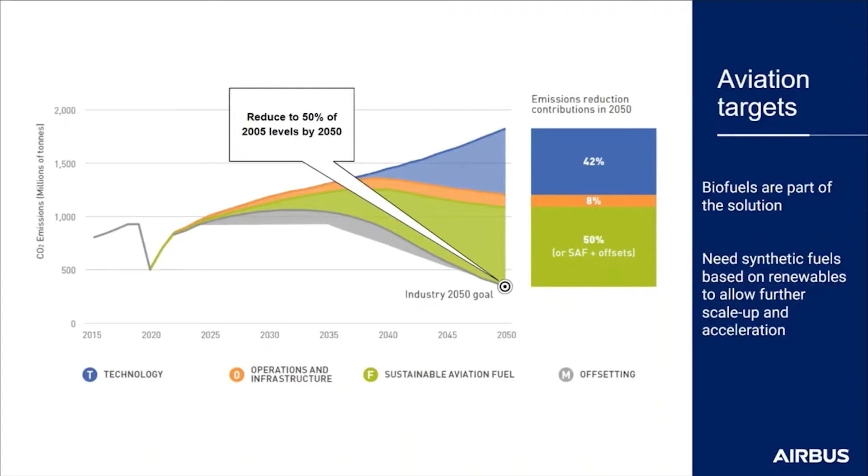But on top of biofuel, we need to scale up the use of synthetic fuels. And synthetic fuels essentially are of two types. The first type is what we call a drop-in fuel, a fuel that we can use in existing aircraft. And the other type of synthetic fuel is hydrogen, which can be used in its raw form on future ZEROe aircraft, which we're planning on bringing into service by 2035.

What we also see is a huge and fast evolving societal and regulatory expectation. We have seen that the UK was the first major economy to pass a 2050 net zero.

Sorry, it seems to have dropped out again.

UK was the first major economy to pass a 2050 net zero emission law. We saw New Zealand following suit in November 2019 with the 2050 net zero emission law. The EU stated its ambitions for the EU Green Deal in December 2019. We've seen Japan in October 2020 stating a greenhouse gas emission reduction plan to zero by 2050.

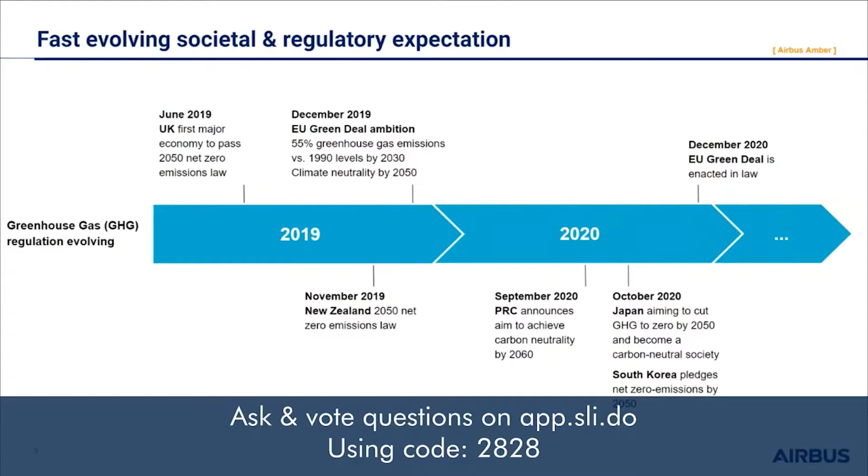At the same time, what we need to do is get rid of the climate impact. We know that this is what is needed in terms of future business, and we also know that it's a moral obligation to provide the benefits that aviation can provide without its climate impact.

The other element of strategic context that's quite important to take into account is that synthetic fuels, whether it's drop-in fuels or hydrogen in its raw form, need to be generated from renewable energy. So essentially what we're talking about is powering the future of aviation with renewable energy.

And those of you who've done your calculations will know that we can't put solar panels and wind turbines on top of aircraft. So we need to keep those on the ground while using hydrogen and synthetic fuel as a surrogate for that renewable energy on board the aircraft. And if that's our plan, then it's really important to understand what's happening in the renewable energy ecosystem.

And those of you following the discussion about what we need to do to get to the Paris Agreement, not just for aviation, but as a society at large, will know that we're not there yet in terms of renewable energy in absolute quantities. We still have huge progress that we need to make. But what's very interesting to look at is how renewable energy is growing over the last 5 years and what the predictions look like going into the future.

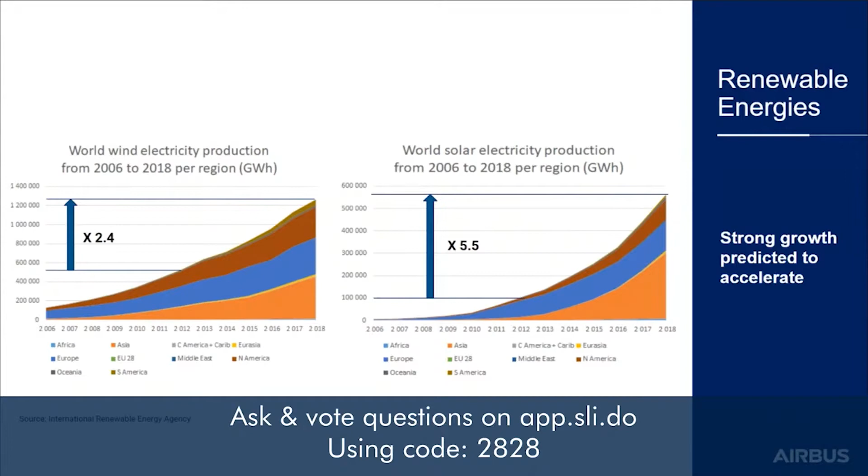And these figures are about to be published for 2019 and 2020. And we will see this growth continuing, and it will continue to grow, in our view, at an exponential rate as we go through this current decade. And strategically for Airbus, that's important because it means that we will be able to power aviation with renewable energy with this strong growth of renewable energy that we're going to see over the next few years.

What's also really important in terms of strategic interest for Airbus is how the hydrogen economy is developing. And Ron mentioned earlier how the hydrogen story has gone almost viral, and it's true. I started on this project in 2017. It got officialized inside Airbus in 2018. At that point in time, there were for sure some signs that hydrogen could be interesting for various sectors to decarbonize, but not the same level of commitment, of communication, of demonstrators, of vehicles as what we see today.

There are now 9 truck companies who have either revealed hydrogen concepts or have hydrogen vehicles even currently on the road. The diesel trains are in many cases going to be replaced by hydrogen trains, where it's more cost effective to put hydrogen on board rather than put electrical systems overhead. We see the shipping industry going towards liquid hydrogen, in particular for what are called intracontinental missions. Perhaps the longer deep sea missions won't be appropriate to be covered by hydrogen, but the intracontinental missions look of interest. And we see more and more hydrogen buses being put on the road across the globe because of hydrogen's potential to eliminate emissions.

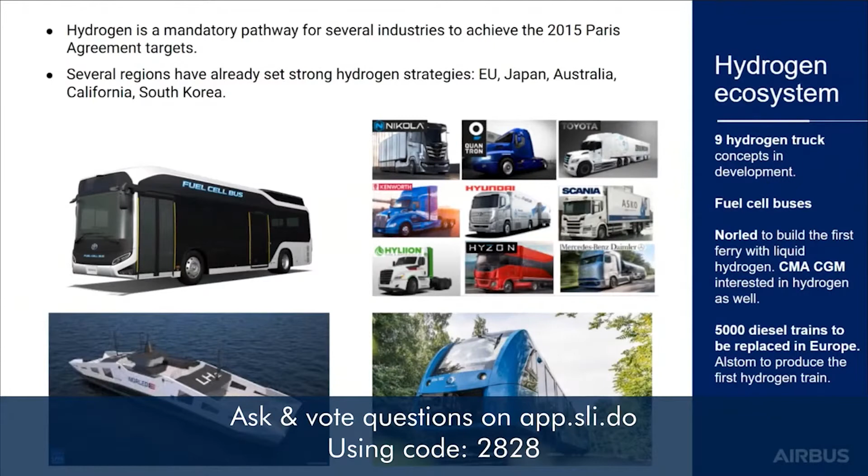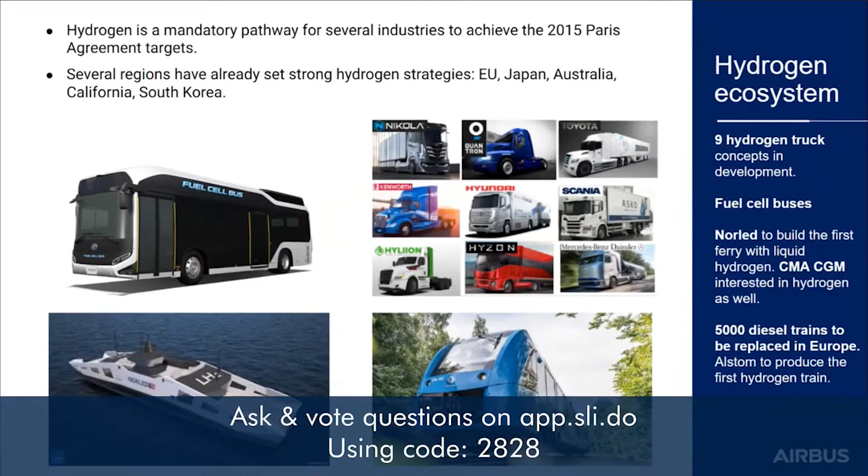And this is super important for aviation because on our own, we cannot create the hydrogen ecosystem that's necessary. And what's doubly important is how the trucking industry and intracontinental shipping is starting to focus on liquid hydrogen as its energy carrier, which is really what we need for aviation. Liquid hydrogen is the only option for us really for interesting payload and range, and therefore having a liquid hydrogen ecosystem and teaming with trucking, with intracontinental shipping is going to be important to drive the ecosystem in the right direction.

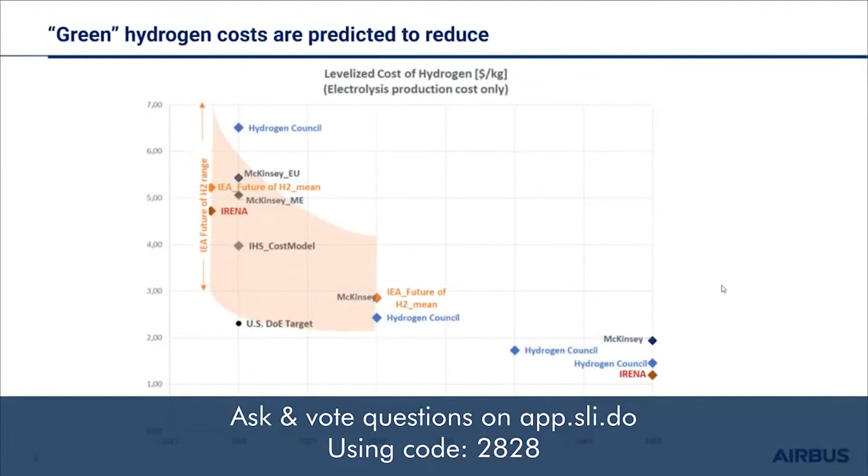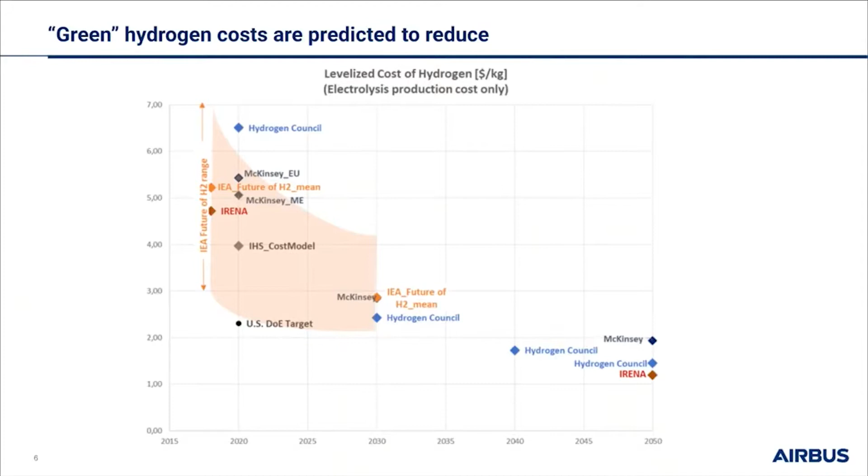What all of this means, the renewable energy growth, which I showed you earlier, the huge commitments from various industries to be scaling up use of hydrogen over the next decades, is that we're going to see a significant reduction in cost of hydrogen over time. And that's important because ZEROe is not just a technology project. It is about making zero emission flight economic. It's about bringing accessible aviation to be available and to be economically accessible by everybody. So the price of hydrogen and how it evolves is going to be critically important in our success.

And it means that we are working with an ecosystem which goes beyond the usual aviation borders, from renewable energy providers all the way through to liquid hydrogen producers and airports, to really make sure that we can get the right cost of liquid hydrogen at the airports and therefore make zero emission flying commercially interesting.

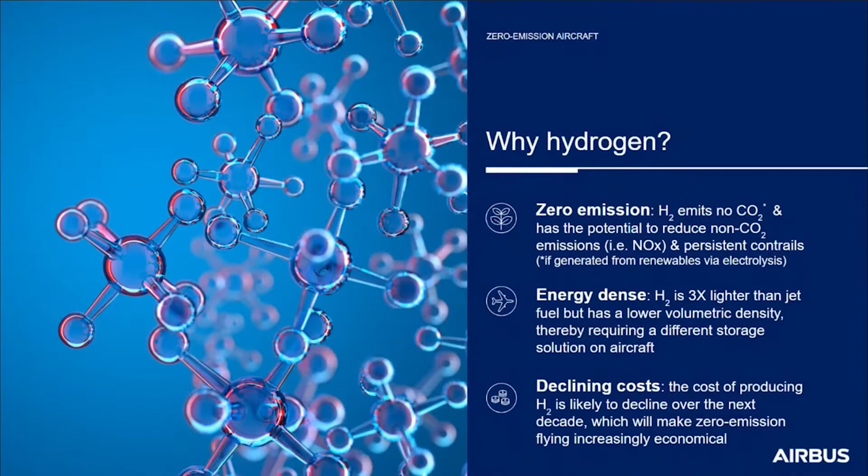So a little bit on why hydrogen. Hydrogen, if it's produced from electrolysis, which is really the pathway we are encouraging and pushing, emits no CO2 during its life cycle. It has also the potential to reduce what we call non-CO2 emissions, NOx and persistent contrails. Potentially, it can completely eliminate these non-CO2 effects. And I'll talk about that when I talk about one of the aircraft concepts that we revealed in December last year. And so therefore, hydrogen provides us with the potential to have genuine zero emissions aircraft.

Hydrogen is energy dense, certainly compared to batteries, which is the only real zero emission alternative. Hydrogen is significantly more dense. We're talking about orders of magnitude in terms of watt hours per kilogram of energy storage. For sure, it has some complexities in terms of the amount of volume that hydrogen requires to store, and that does impact how the aircraft are designed, but something that looks feasible to be able to master and take into account for bringing these aircraft to reality.

And hydrogen is on top of interest because of how we believe the economics of hydrogen are going to evolve over the next decades. We're going to see the cost reducing. We're going to see hydrogen becoming a part of more or less everyday life. If we look at what is required, not just for aviation, but at the global level for us to meet the Paris Agreement, hydrogen is going to be a big part of that story. And so costs are going to come down, availability is going to come up, and we're going to benefit from that in aviation.

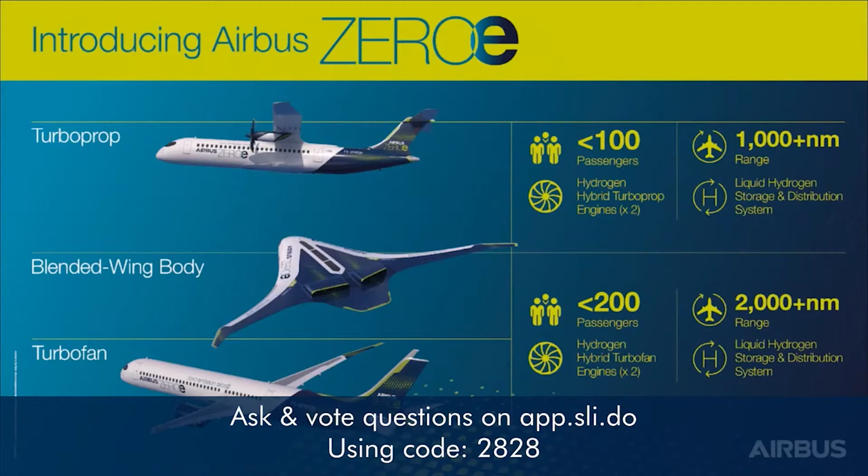Then the aircraft configurations do look quite different. The top configuration is a turboprop configuration. The bottom one is what we call the turbofan configuration, and then in the middle we have the blended wing body. And what I'd say maybe to make things clear is that the blended wing body for sure is a configuration which looks really interesting in terms of ultimate ambition for a hydrogen-powered aircraft. But it is not likely to be the first zero-emission aircraft that we bring to market by 2035.

The blended wing body, because of this extra volume that it has naturally inside that configuration, is a great platform for storing hydrogen, which has more volume requirements than kerosene. But dramatically changing the aircraft configuration and the propulsion system in one step we see as too much, and therefore what we're likely to have as a first step is a tube and wing type configuration similar to the turbofan or the turboprop aircraft, but with a dramatically different propulsion system.

And what you see in terms of numbers here is that the hydrogen aircraft have quite a large range of scope. It means that all the way from general aviation, which many of you have probably seen examples of, all the way up to 100-seat and 200-seat aircraft, hydrogen can help with eliminating their climate impact, and all the way from 1,000 to 2,000 nautical miles in terms of mission. So hydrogen has quite a range of application.

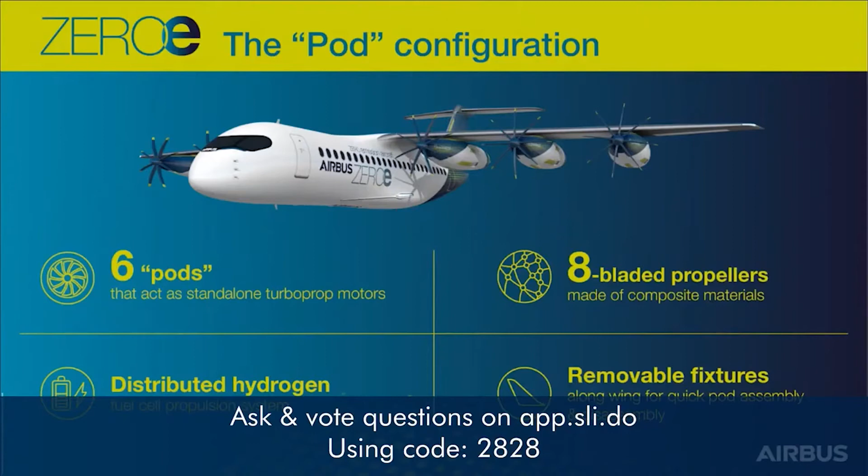We're still working on how the technology scales to what aircraft size and what economics we could have with this kind of configuration. And between all four concepts and several concepts that we've not publicized, we're looking at different options in order to decide which is the final configuration that we want to bring to service. So hydrogen is not without its challenges. We're not doing this because it's easy. We're doing this because we think it's the right thing to do.

In terms of challenges, for sure, the technology in some areas exists already. So for example, gas turbines have even flown in the past with hydrogen combustion. The US Air Force flew a B-57 in the 1950s with hydrogen. The Tupolev 155 was flown in the 1980s with hydrogen. But we need to bring the weight and cost down, adapt it to commercial applications before it would be ready to be taken on board a commercial aircraft.

In terms of regulation, we are not today using hydrogen in commercial aviation, and so standardization, rulemaking, all needs to be put in place in order to allow us to do that. The infrastructure needs to be put in place, and we're working with airports and energy suppliers to even start bringing hydrogen into airports in the 2020s. So we are developing a concept called hydrogen hubs, airport as a hydrogen hub, where hydrogen is used in the 2020s to decarbonize ground applications around airports, and then scaling up and readying the airports for hydrogen usage on aircraft in the 2030s.

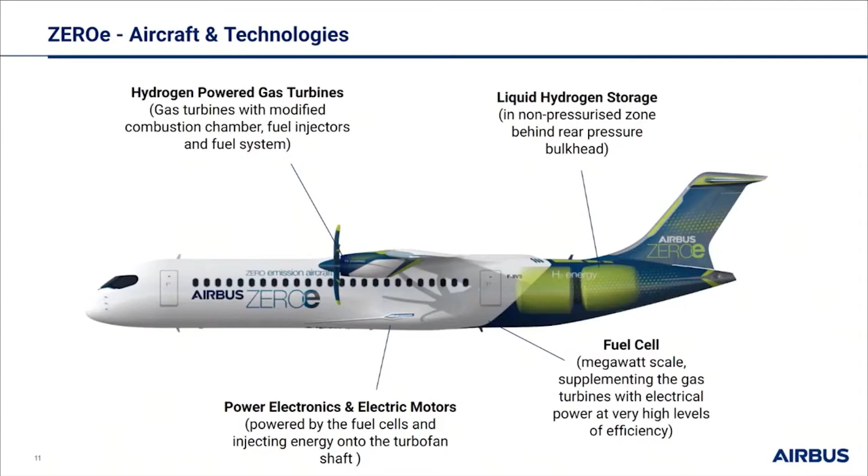for independence for safety. We have fuel cells which are required in this hybrid electric configuration in order to optimize the propulsion system. Fuel cells can operate at 60+% efficiency. During some phases of flight, the gas turbine is operating at significantly less than that, and so complementing the gas turbine with electric power from the fuel cells can be interesting. We have power electronics and electric motors in terms of technology which allow the conversion of the electrical energy into shaft horsepower that are embedded also in the gas turbines.

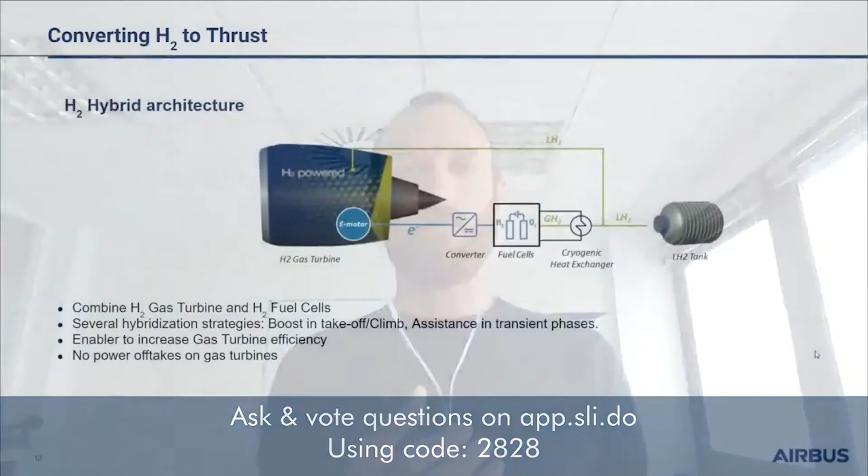In terms of architecture, the simplistic view is what you're looking at now. So you have the liquid hydrogen tank on the right-hand side. This is then feeding both the gas turbine for hydrogen combustion and then a parallel path for a parallel hybrid configuration, which feeds the fuel cells, the electric converter, and the electric motor. The combination of the two in a hybrid electric parallel configuration looks very interesting.

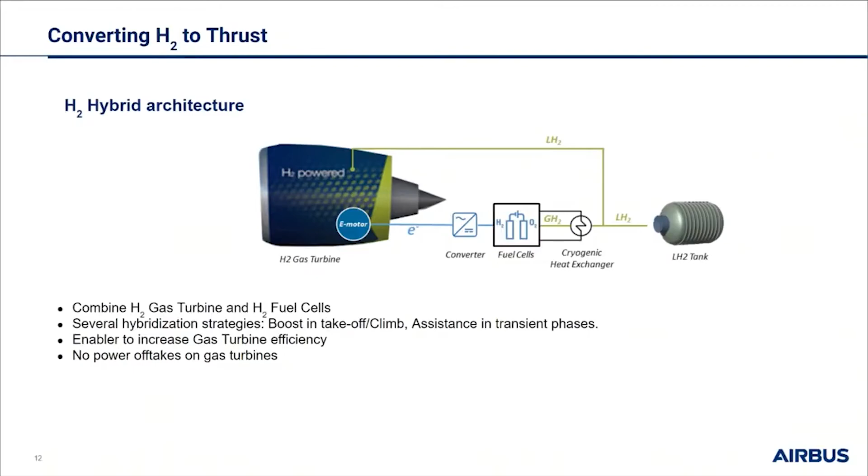And the only difference between this architecture that you've just seen and what would be needed for a fully electric fuel cell aircraft is that you essentially remove the gas turbine pathway, which is what we're exploring with the fourth configuration that I shared with you this afternoon.

We've established a joint venture, which we communicated on in the last part of 2020. It's called Aerostack GmbH. It's based in Stuttgart in Germany. And this joint venture is a collaboration with an automotive player. It's aiming at taking fuel cells, which are already at quite a high performance level for the automotive industry, and developing them further for aerospace and for commercial aviation applications.

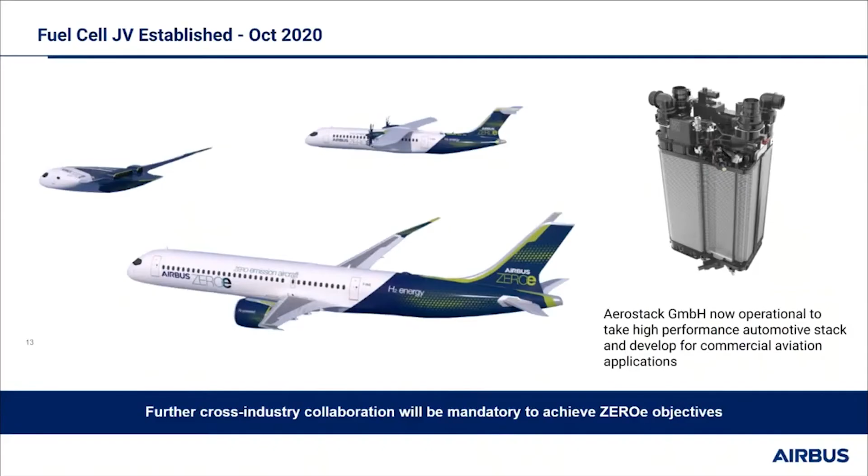I think one thing that this JV perhaps highlights to you is how serious we are about this ambition. This is not just a paper study. This is something that we are strategically positioning ourselves on, which we are investing millions in order to make it happen and bring zero emission flight to reality.

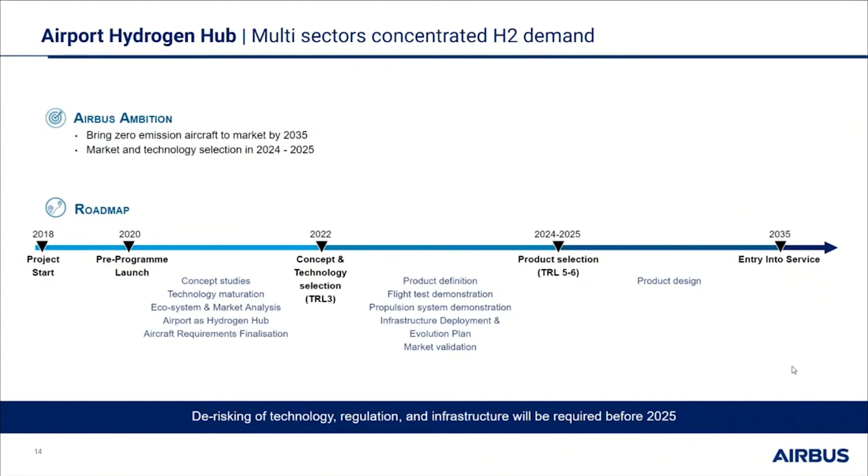In terms of timeline, we have the ambition to bring the zero emission commercial aircraft to market by 2035. We plan to have a product selection and finalize all of the concept work by 2025. This will be fed by technology maturation, flight test of hydrogen propulsion systems, and also a lot of work on the ecosystem and airport as a hydrogen hub, for example, which is an important part of the program and needs to be secured in order for us to achieve the entry into service.

That's a quick whistle-stop tour of what I wanted to share with you this afternoon. Thank you for your interest. I'm not sure if we have time for any questions. If we do, it would be my pleasure to try to answer them.

Yeah, Glen, thank you very much for your speech and your elaboration on this big, hairy, audacious goal that Airbus has set itself. Not easy, and a lot of challenges ahead. We don't have a lot of time for questions, but there was one burning question from the group of students: to take advantage of new technologies, a lot of money is required. Who will be able to fund and afford all this, and will it still be viable and economical?

Yes, it will still be viable and economical. This is clearly our goal. There's no point in doing this if we can't make it economically viable. That's how it will scale. That's how it will have the most environmental benefits. So this is really a key part of the project. In terms of who will be able to afford it, for sure, Airbus is positioning itself to be able to afford it. We will need help, though. We will need help from the national funding frameworks, from the European funding frameworks like Clean Sky.